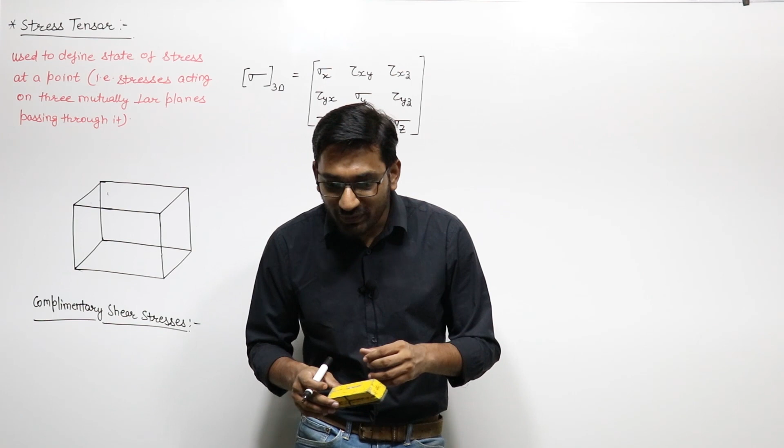This can be known with the help of two methods, the maximum stress acting at this point, or we can represent the state of stress at this point by two methods.

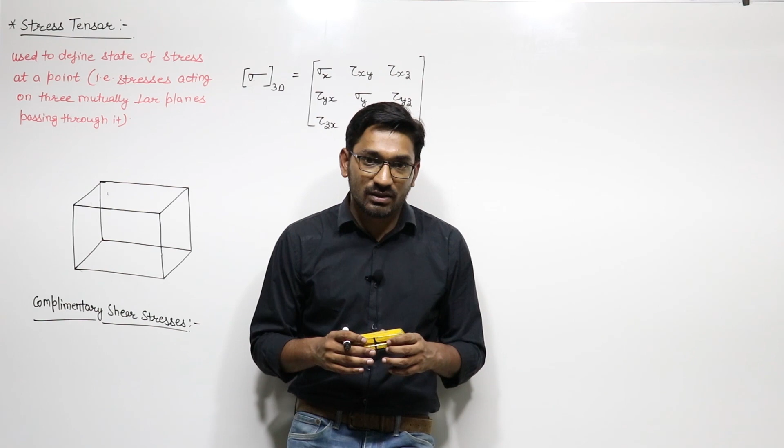One is your matrix method, or you can say the stress tensor is one method, that is a matrix form, and another one is with the help of Mohr circle, that is a graphical method, right? We will study the Mohr circle later on.

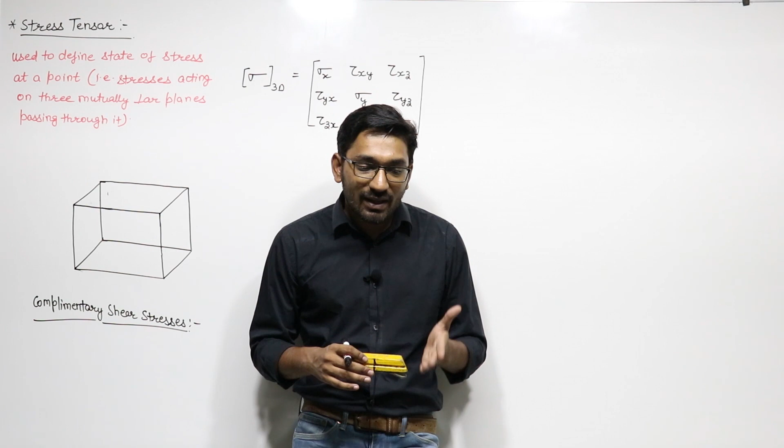So to define the state of stress at a point, there are two ways. One is this matrix form, that is the stress tensor, and another one is the Mohr circle, that is the graphical form. So let us discuss what the stress tensor is.

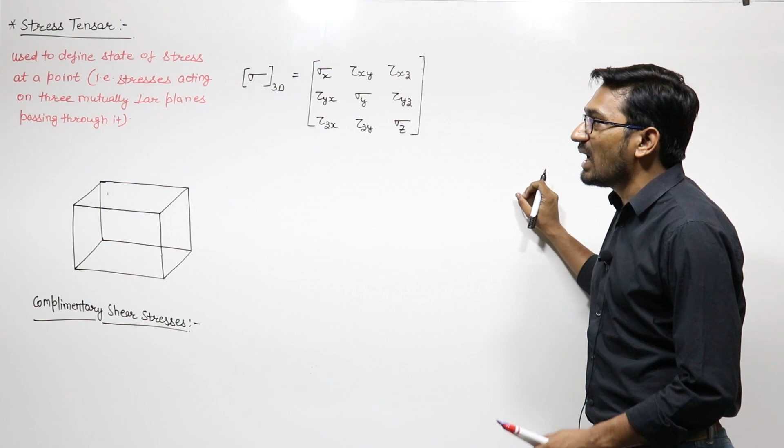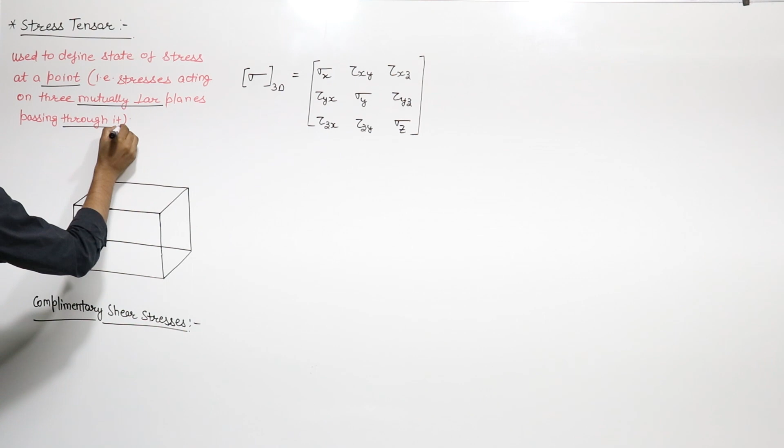The stress tensor is used to define the state of stress at a point. We know stress can be calculated at a point only, that is the stresses acting on three mutually perpendicular planes passing through that point.

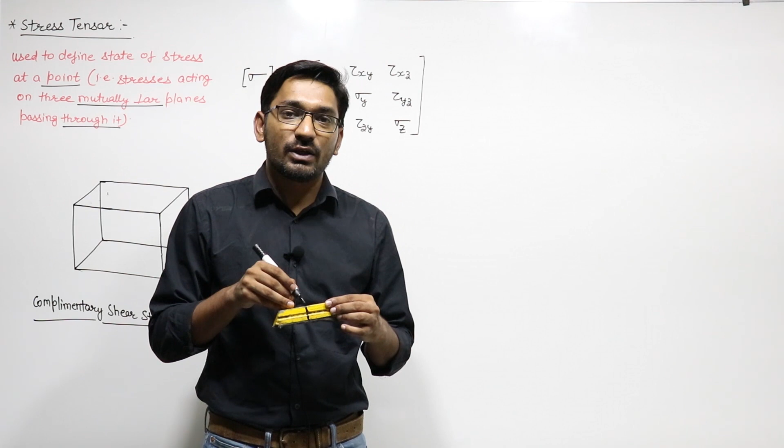Means if you want to find the state of stress at this point, it means the type of stresses acting on the three planes passing through that point, and these three planes are mutually perpendicular to each other. One is this plane, your front plane, one is this top plane, and one is this side plane.

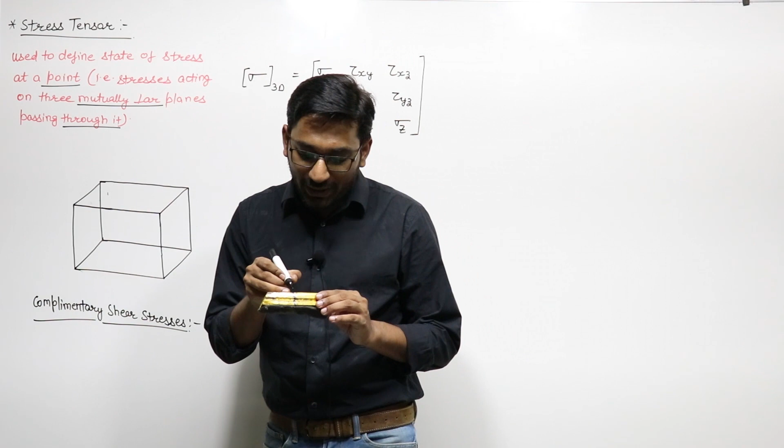So we have to calculate the state of stress at this point. If at this point, this is the point, if I enlarge this point, I will get this figure. This is the figure of this point, right? This is not the member, this is the figure at this point, right?

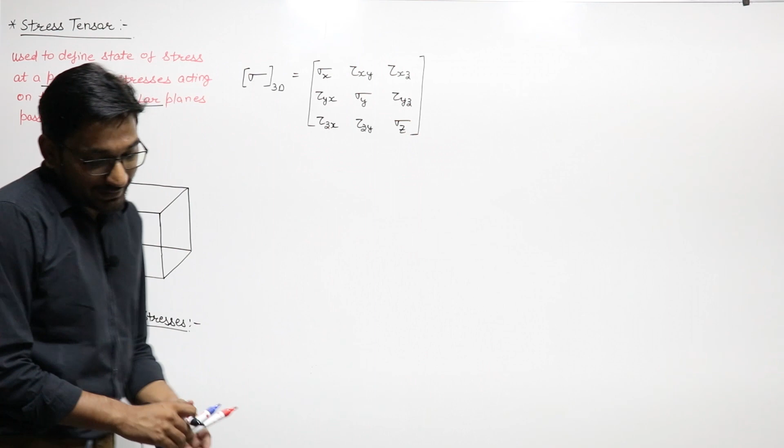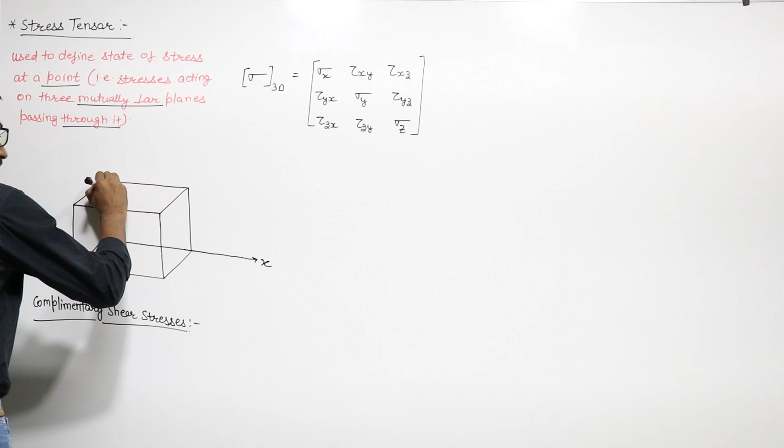If you enlarge this, let us say this is the figure of this point, that is a cubic figure or 3D figure. I am supposing this is your x-axis, this vertical axis is your y-axis, and the third axis, this is your z-axis, right? I am assuming this x, y and z-axis.

We know if this is the x-axis, so this is your x face. This is the y-axis, so this is your y face. We already know that, we already studied this. And if this is the z-axis, so this front plane is your Z face. There are three faces which are present, X, Y and this Z face.

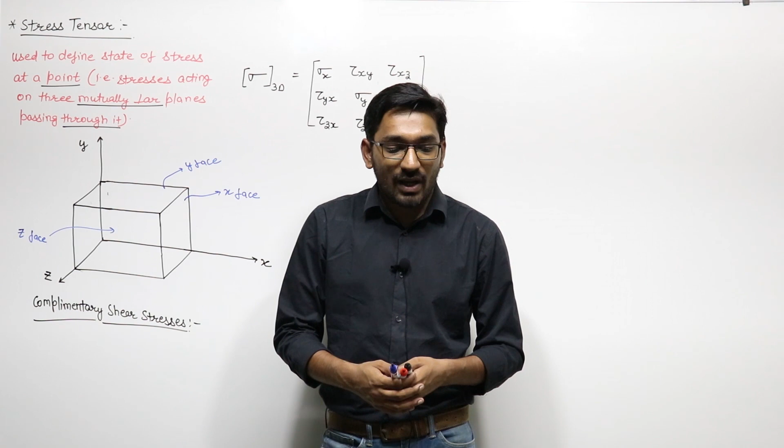Now if I say that these faces are under triaxial loading, the stresses induced on these three faces total 9 stresses. We already see, out of that 3 are normal: sigma X, sigma Y and sigma Z, and 6 are shear stresses: tau XY, tau YX, tau XZ, tau ZX, tau YZ and tau ZY. We know this, and the meaning of tau ZX is on the Z face in the X direction. We already know all this.

So if I represent the state of stress at this point, let us say on the X face, the normal stress is your sigma X. On the Y face, normal stress is your sigma Y.

On Z face, your normal stress is sigma Z. Let us say this is your sigma Z. These are the normal stresses on these three faces: sigma X, sigma Y, sigma Z. We are saying that all 9 stresses are present.

So on X face, there must be a shear stress, that is tau XY, the shear stress on X face in Y direction. This is tau XY on X face in Y direction, and there is this one, tau on X face in Z direction, tau XZ.

Now on sigma Y or on Y face, there must be one tau YX, meaning on Y face in X direction, and there must be tau YZ, on Y face in Z direction. We already see that there are complementary shear stresses.

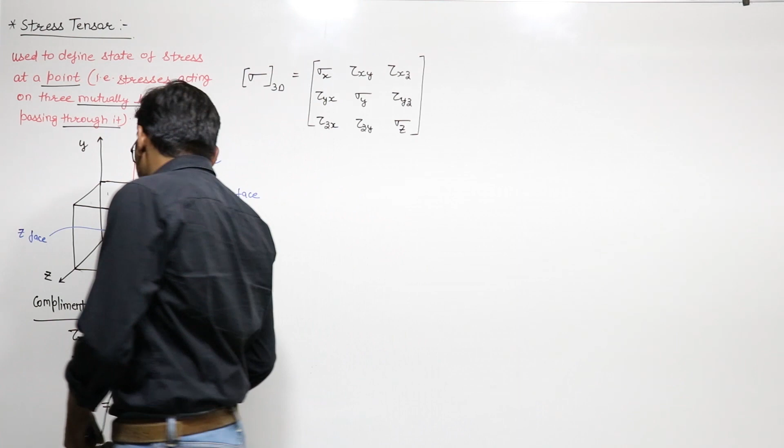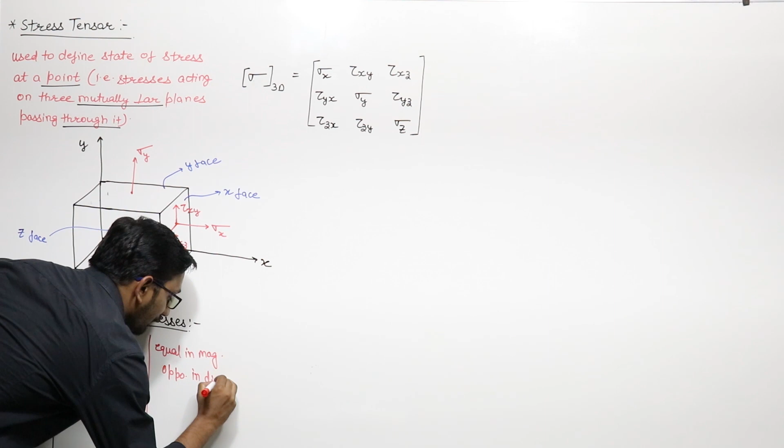All these three complementary shear stresses are equal in magnitude but opposite in direction. Opposite in direction means that if one shear stress gives you a clockwise moment, then another shear stress will give you an anti-clockwise moment to maintain the equilibrium.

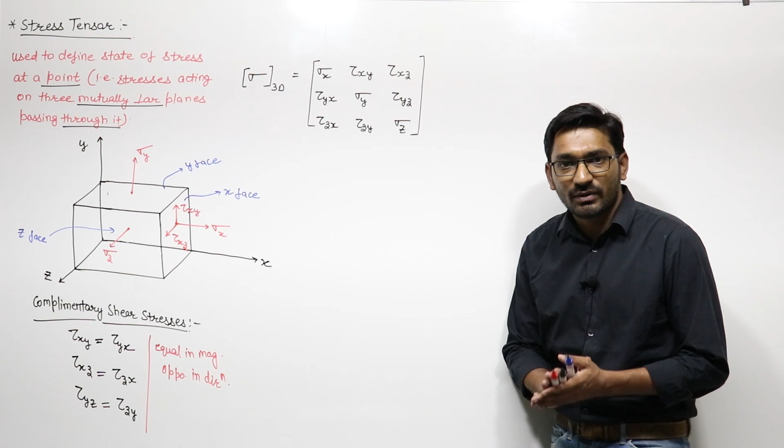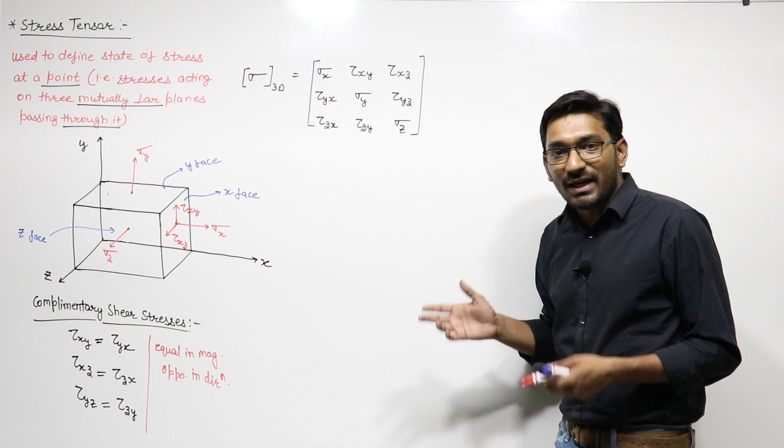To maintain the equilibrium of this member, if tau XY gives me a clockwise moment, then tau YX must give me an anti-clockwise moment. Now we have to represent the stresses like this. This is tau XY, and this tau XY is in this upward direction. Here also this is X face, here also there is one sigma X, there is also one sigma X.

This is tau XY in upward direction, so there must be a tau XY in downward direction. And here tau XZ is in this direction, so tau XZ in this plane will be in this direction. This is tau XZ and this is tau XY.

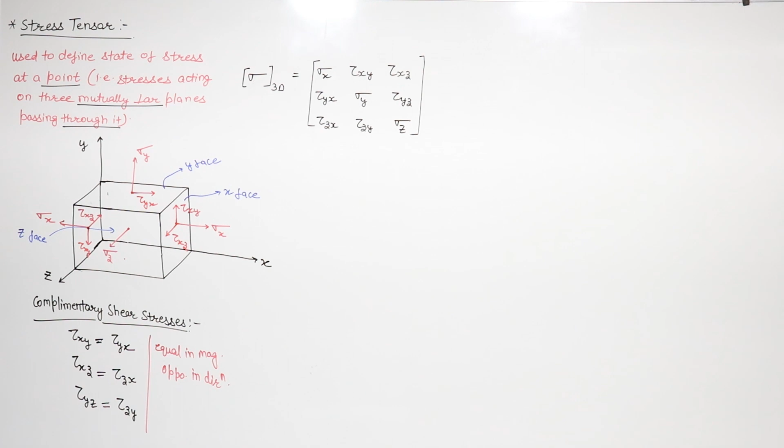So these tau XY will give you a couple or moment in anti-clockwise sense. So the tau YX which is present in this face and in this bottom face will have to give you a clockwise moment, so that this bar or member will be in equilibrium. If this tau XY is giving you anti-clockwise, then tau YX will be giving you a clockwise movement. So the direction of tau YX will be like this, tau YX. Then only this system will be in equilibrium.

Now there must be one tau YZ. Suppose I am taking this direction as tau. This is your tau YZ. It may be anything because we don't know the tau YZ or tau ZY.

So here we have sigma Z. Here we have one tau XZ. If you see that this is tau XZ in this direction, here the tau XZ is in this direction, this tau XZ is in this direction, and it will be in this direction. So it will rotate like this. If you see from the top, this rotation is clockwise. If you see it from the bottom, it is anti-clockwise. You can see it from any one of them.

So this is tau XZ in your forward direction, tau XZ in this plane is in this inward direction. So this will give you a moment in this plane, and from the top this sense is clockwise. So the tau ZX which is in this plane will give you an anti-clockwise movement.

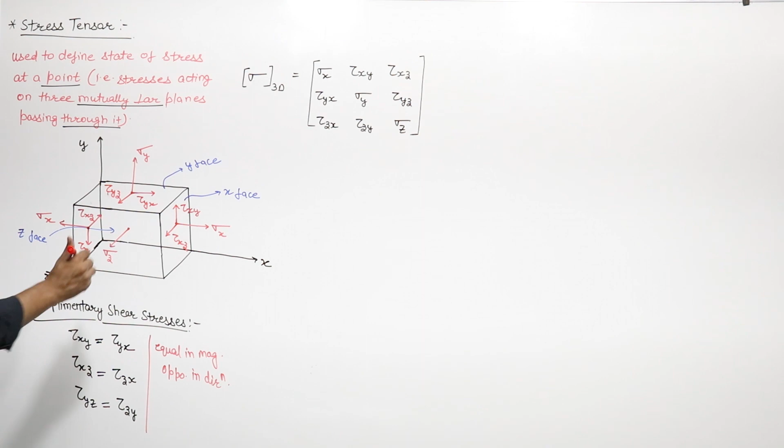So I can write here that one is tau ZX. So if I say this is the tau ZX, this is in this direction and one will be in this direction. So it will give you, from the top if you can see, an anti-clockwise sense. This tau ZX is in this direction.

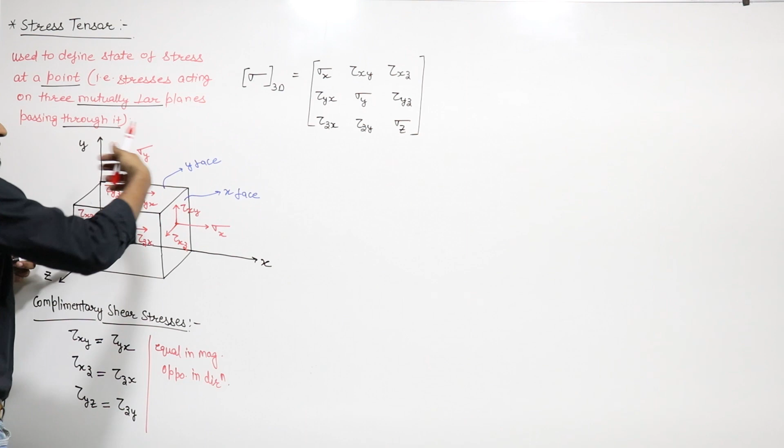The nib will show the direction. Tau ZX, tau ZX on your back of the plane. There is one plane in the back also. So that tau ZX will be in this direction. This tau ZX will be in this direction. It will give you a rotation like this, and this rotation is your anti-clockwise. So the system will be in equilibrium.

And there must be one tau ZY. So you can say that this is tau YZ in forward direction, this is tau YZ, tau ZY. Tau YZ on this top plane will be in your forward direction, tau YZ on this bottom plane will be in your inward direction. So this is the direction. It will give you a moment like this, and if you see from this side, this moment is clockwise.

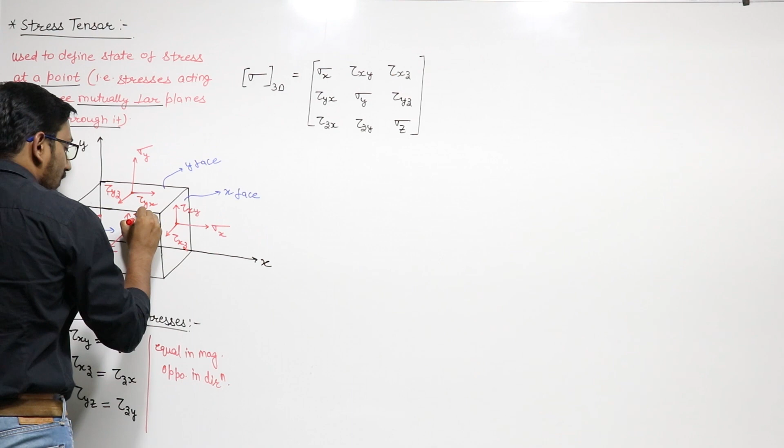This moment is clockwise, so tau zy will give you an anti-clockwise moment. So I can say that this is tau zy, in the upward direction, and this tau yz is in this direction. It will give you a clockwise movement. So if this is clockwise, then tau zy will give you an anti-clockwise movement.

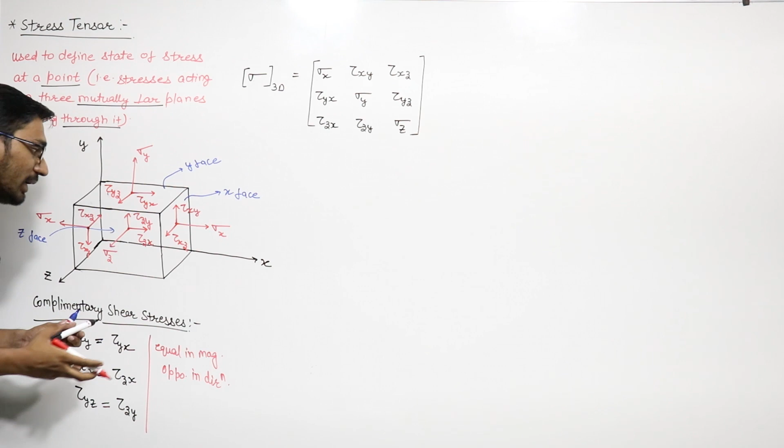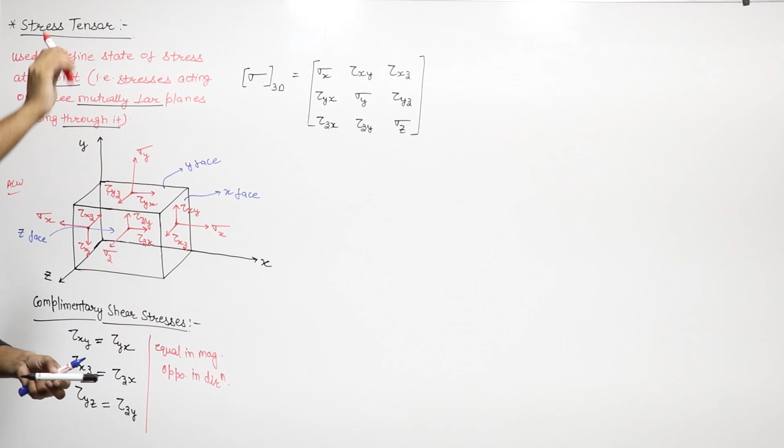So you can say tau zy on this front plane is upward and tau zy on this back plane is downward, which gives you a rotation like this. This is upward, this is downward, giving a rotation like this. So from this side you can say this rotation is counterclockwise, and the system will be in equilibrium.

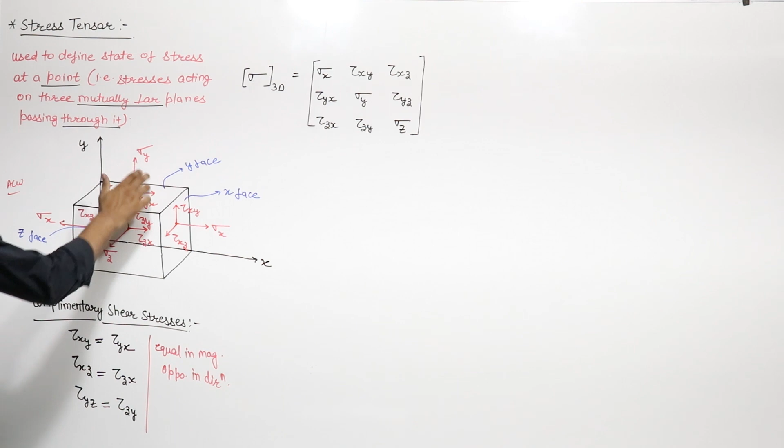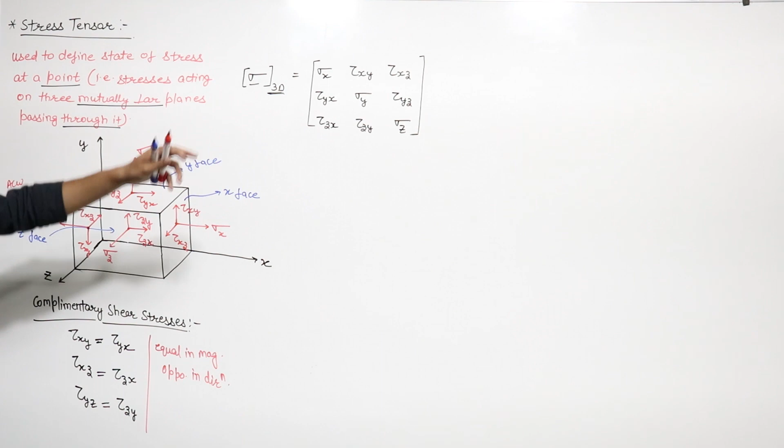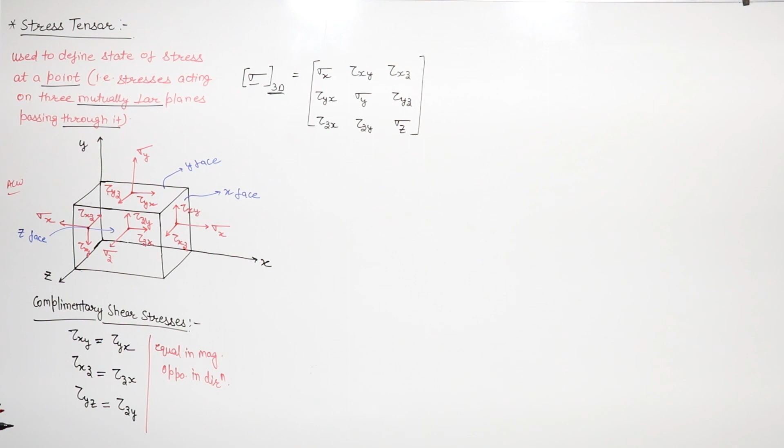So these are the 9 stresses on these 3 perpendicular planes. If I show the matrix form, the stress on a 3D object will be like this: sigma x, tau xy, tau xz; tau yx, sigma y, tau yz; tau zx, tau zy, and sigma z. This is the stress tensor, and you can see this is the stress on the X face.

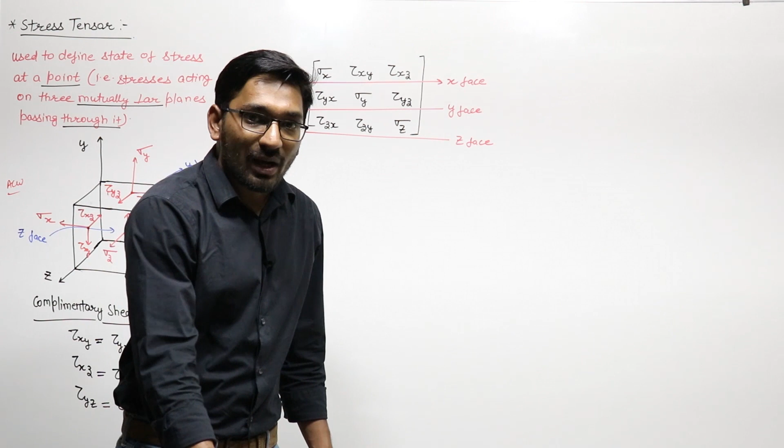These are the stresses on the Y face, and these are the stresses on the Z face. Each row is giving you the stresses on one face.

Now if I say that the complementary stresses are equal, that means the magnitude of tau xy and tau yx are equal, the magnitude of tau xz and tau zx are equal, and the magnitude of tau yz and tau zy is equal, then you can rewrite this stress tensor like this.

It is sigma x, tau xy, tau xz; this is tau yx, which will be equal to tau xy; this is sigma y; this is tau yz on the y face in the z direction; this is tau zx, which is equal to tau xz; this is tau zy, which is equal to tau yz; this is sigma z. So this is the stress tensor.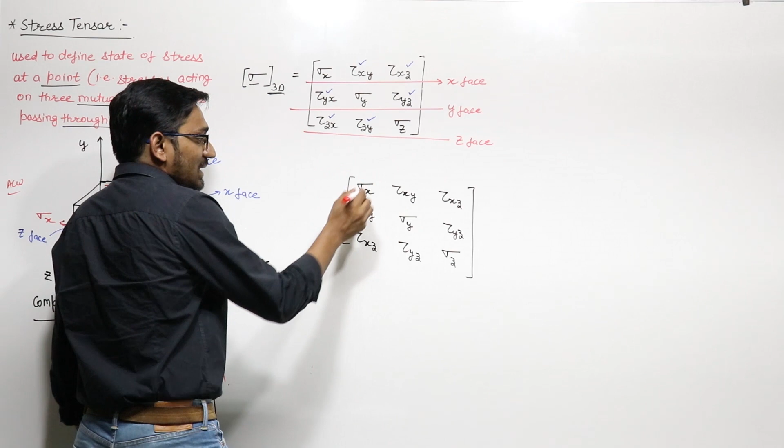And you can say that if this is a matrix, this is the principal diagonal of this matrix, or you can say this is the major diagonal of the matrix.

So the principal diagonal of the matrix is normal stress. On the other side it is shear stress, and this column, these three stresses, are the mirror image of this one. This is the mirror image of this.

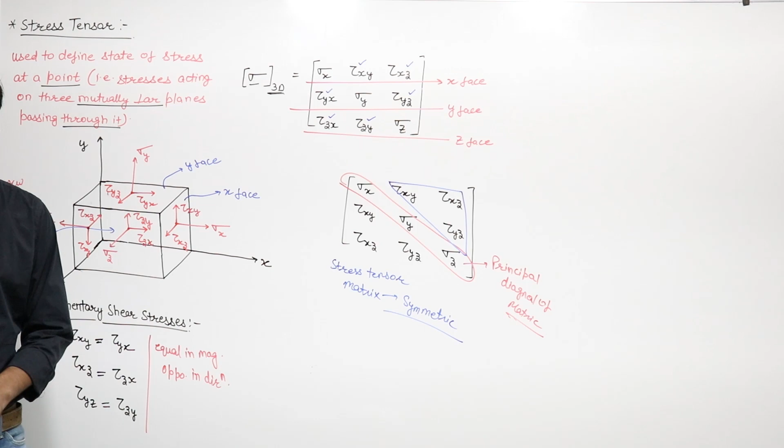So you can say that the stress tensor matrix is a symmetric matrix about its principal diagonal. These three values will be equal to these three values, so it is symmetric about this axis, about this plane.

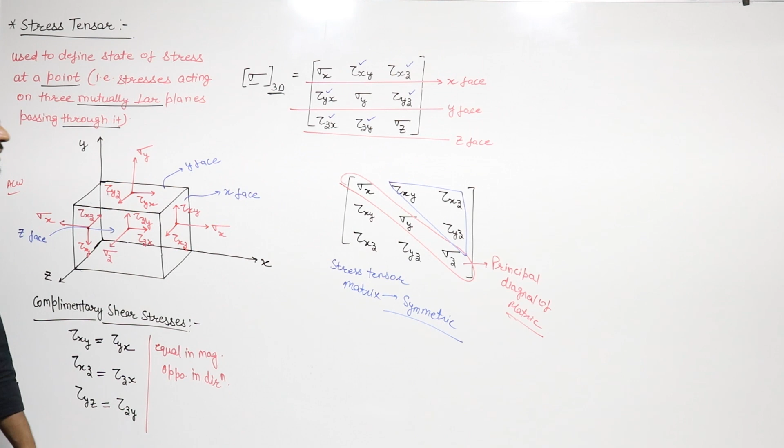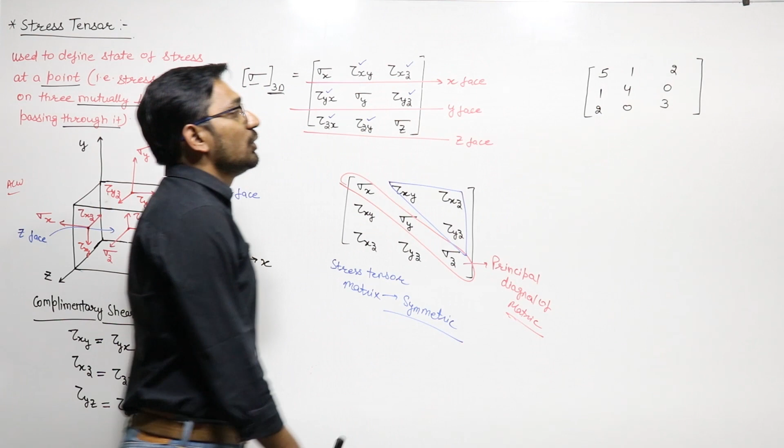So this is the way you can show the state of stress at a point. In any exam question, the stresses may be given in a matrix form like this: suppose this is 5, 1, 2; this is 1, 4, 0.

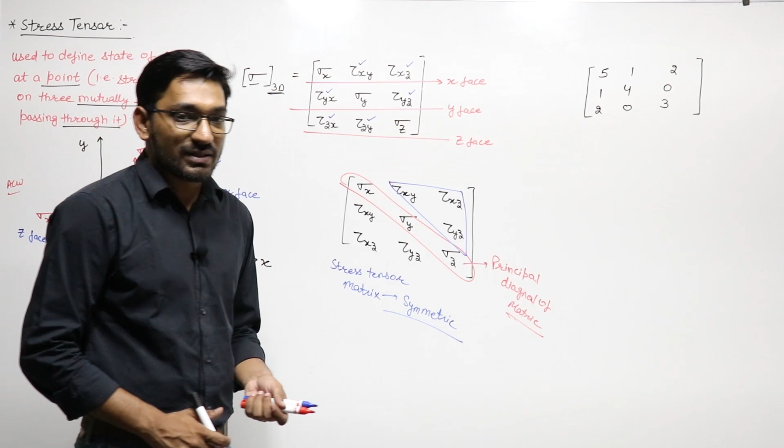This will be 2, 0, 3. If stresses are given to you like this, and we have to calculate the shear stress acting along the xz plane in the z direction: xz plane means y face, so we have to calculate tau yz. This is the face, this is the direction. So tau yz will be 0. Shear stress will be 0.

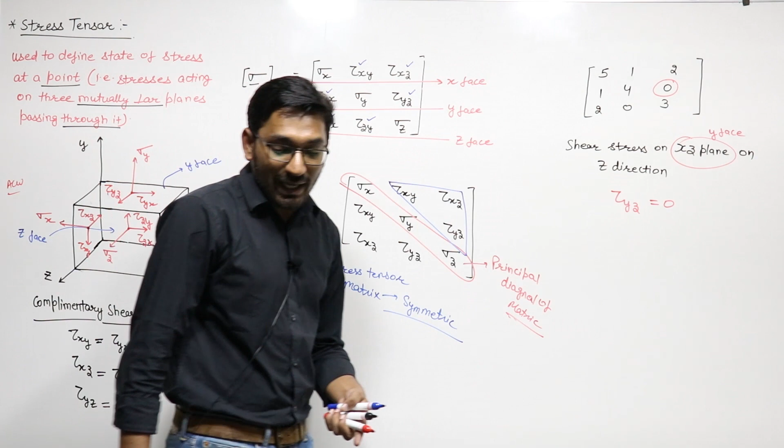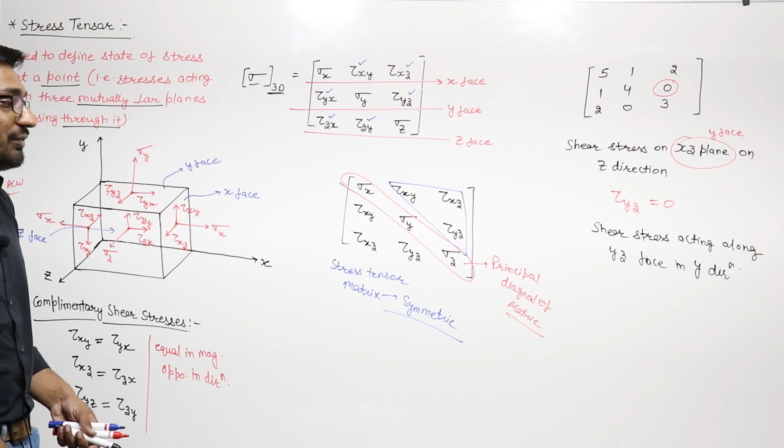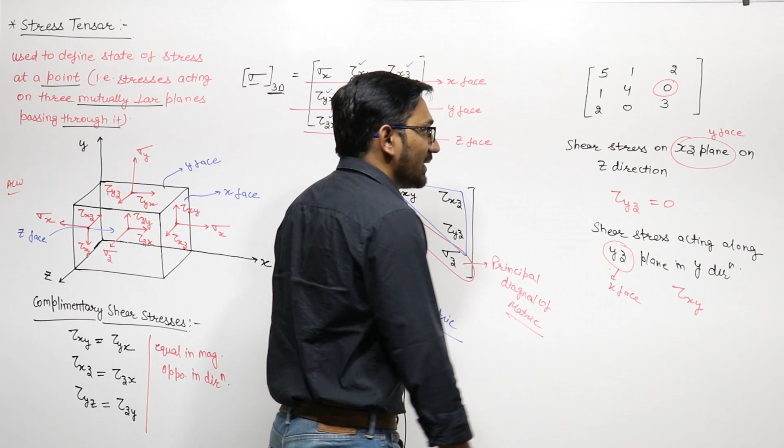And if we have to calculate the shear stress acting along the yz face in the y direction, yz face means yz plane, this is the yz plane, so this means the x face. So you have to calculate tau xy. X is the face, y is the direction.

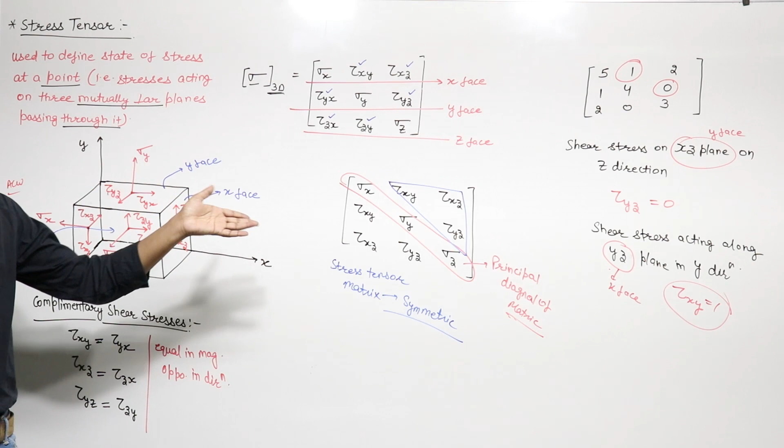So tau xy will be equal to 1. This will be equal to 1. So this is the way you can solve this type of question. This is a gate question, so you can solve the questions like this.

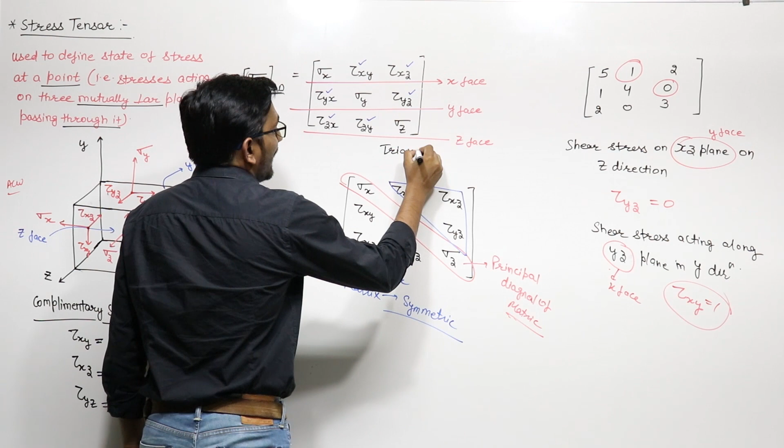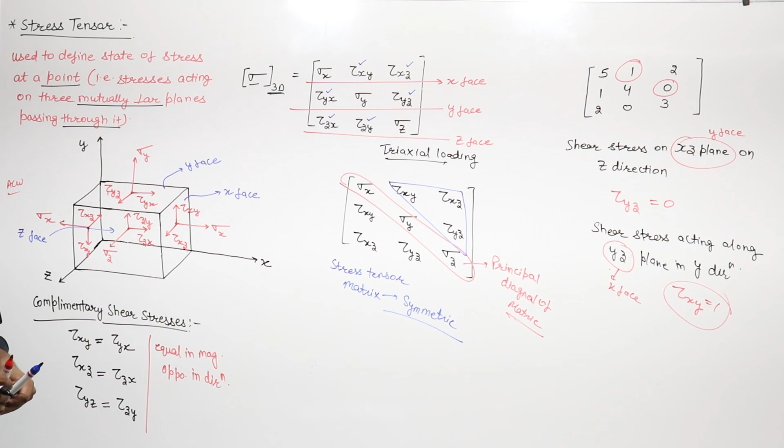And this is the way you can represent the state of stress at any point in triaxial loading. Triaxial loading means in all three perpendicular axes the loads are present, so stresses will be developed in all three planes. So this is the stress tensor in three dimensional or triaxial loading.